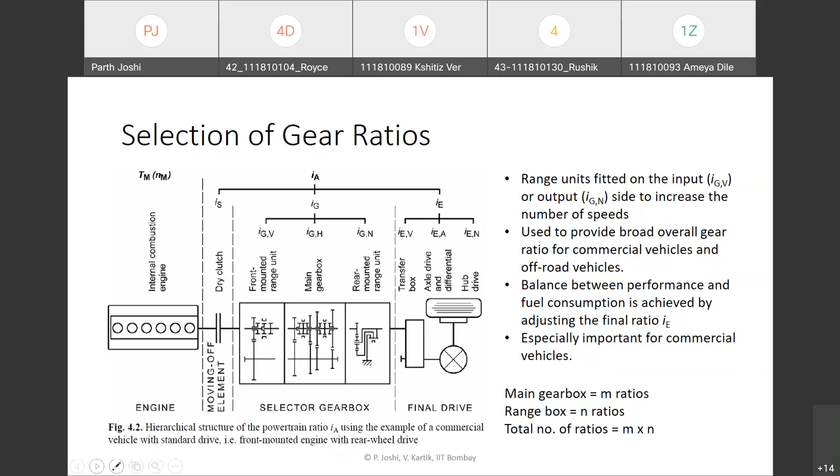No, sir. Yeah, okay, fine.

So we have different gear ratios between, let's say, the engine and wheel, or electric motor and wheel, whatever. So why do we have different gear ratios?

Particularly with respect to conventional vehicles, there's moving off under difficult conditions, which means accelerating from zero speed. Let's say if the vehicle is stuck in a pothole or anything, then we need a very high torque to get going and move it out. So then we need a high gear ratio for that.

Then, to reach the required maximum speed, again we need a gear ratio that will enable the engine, the appropriate ratio, so that it is able to propel the vehicle to that required speed. So these are kind of two extremes: one is having a high gear ratio so we get very high torque, and the other is getting the appropriate ratio between the speeds so as to be able to achieve a certain amount of vehicle speed.

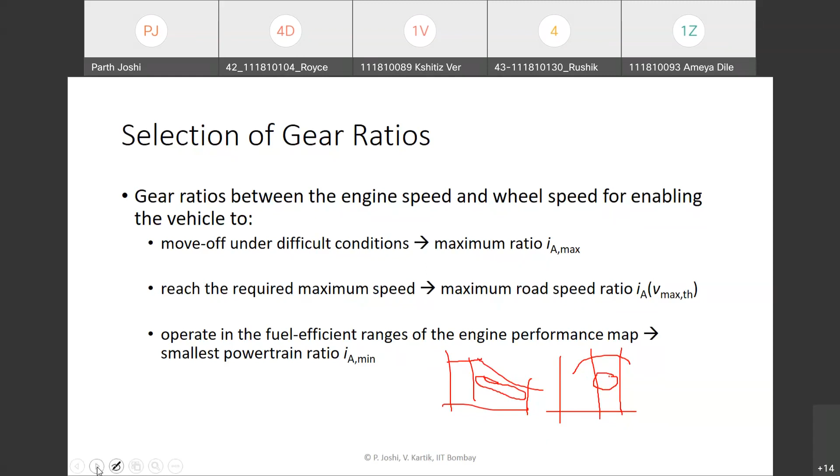So the gear ratios that we select should enable the IC engine to operate in its best fuel efficiency zone. Having a wide overall gear ratio is especially important for passenger cars with powerful engines and very low drag coefficient, like more sports or utility kind of vehicles. So then for that, having a wide overall gear ratio is very important.

So having a very low, I mean let's say first gear ratio should be very high, and the ratio of the highest gear should also be such that we are able to achieve a very high vehicle speed. So that means we are asking for a very wide overall gear ratio in that sense.

In this figure, it is shown that for a certain range of engine speed operation, what is the corresponding vehicle speed range, or let's say for this case, the gearbox output speed. So a certain engine speed corresponds to a certain gearbox output speed depending on the gear ratio chosen. For the maximum gear ratio, the gearbox output speed would be probably at this lower end, so we get a high torque but low speed. On the other hand, for the minimum gear ratio, we get this kind of ratio between the engine speed and the gearbox output speed. So within this shaded envelope, we will get the corresponding gearbox output speed for a certain chosen ratio.

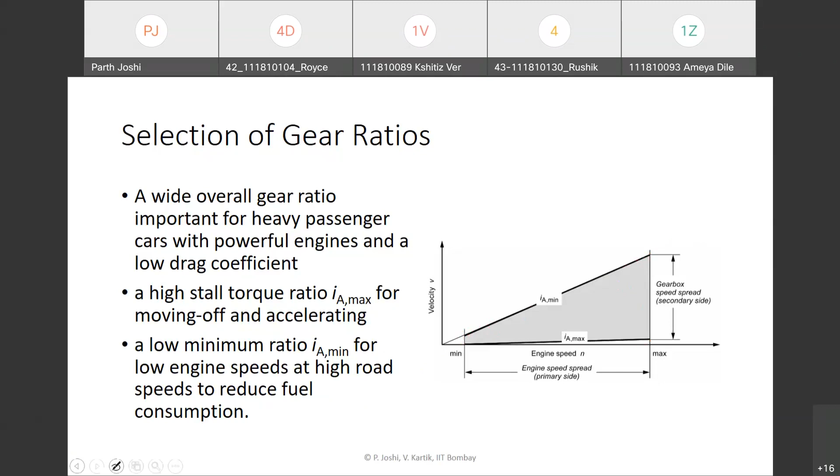Now we'll look at this term called overall gear ratio. This is basically defined as the ratio between the largest and the smallest ratio, or the first gear ratio divided by the last gear ratio. To put it simply, this overall gear ratio, for any particular application, depends on what is the specific power output - that is, the rated power divided by the total mass we can expect for the vehicle. It also depends on what is the spread of the IC engine speed, and also depends on the intended use.

So by speed spread, let us say we have the torque versus speed kind of plot, this is the minimum and maximum. Whatever is the range between them, that is the speed spread.

We need large overall gear ratios, especially for commercial vehicles, because they have very low specific power output. For a certain amount of rated power, they carry a lot of mass along with them. So we need several gear ratios, especially more on the lower side, because they generally operate at low speeds.

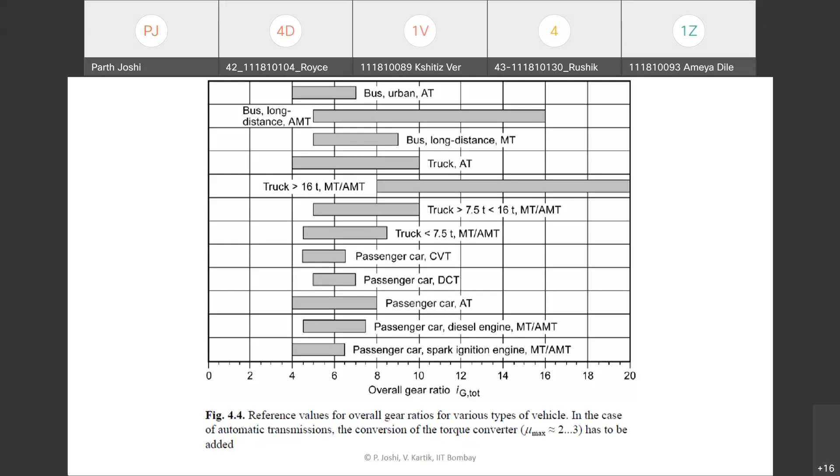Now we come to the selection of the gear ratios particularly. How do we select the largest gear ratio? The largest gear ratio is for the lowest gear. This is mainly required.

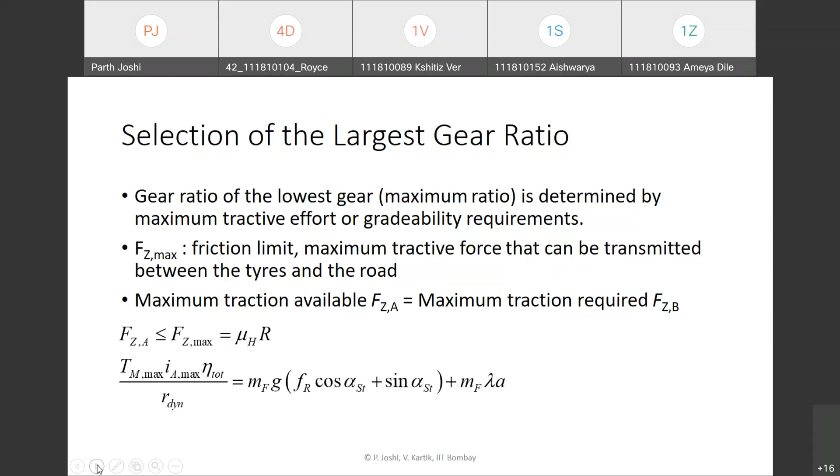Generally for passenger cars or commercial vehicles, we can design the transmission's largest gear ratio for maximum gradability. Gradability, as we saw in the previous session, is the maximum grade that the vehicle can climb at a certain constant speed.

Let us say the vehicle just gets moving, like at 1 km per hour speed or even less, just crawling and trying to climb a certain steep slope. So what will be the slope the vehicle is climbing? For that grade or angle alpha of the road inclination, we use the previous equation to find the value of i A max.

So using this equation we can calculate the largest gear ratio.

So this was the gear ratio based on torque requirement. Now in addition, there are some categories of vehicles which have so-called crawler gears. These kinds of vehicles, like building construction vehicles or road sweeping vehicles, or some other commercial vehicles, move at extremely slow speeds.

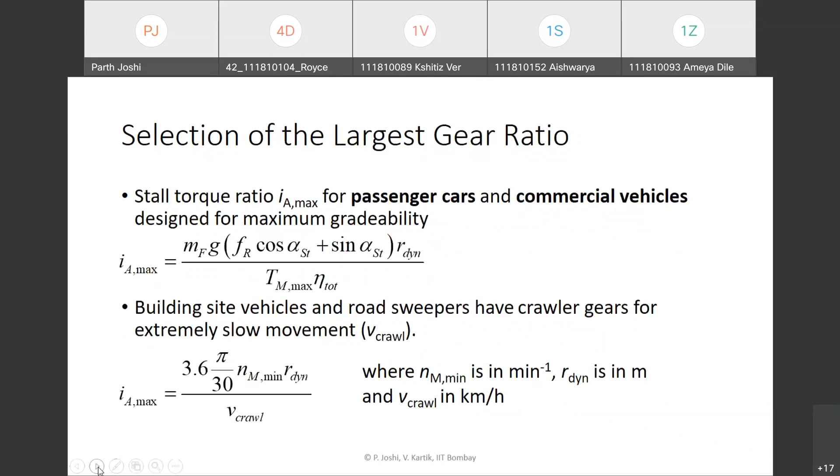So now we saw how we select the largest gear ratio. Now we will come to how we select the smallest gear ratio. The largest gear ratio was dictated by torque requirement, whereas the smallest gear ratio is selected on the basis of the requirement of maximum speed.

Let us assume there is zero slip in the power transmission from the wheel to the road - an ideal power transmission. We also assume that the maximum speed of the vehicle is reached at the maximum engine speed, which is a reasonable assumption.

So the maximum vehicle speed determines the ratio of the highest gear. We know the maximum engine speed, and if we know the maximum vehicle speed that has to be achieved in the highest gear, we use the simple kinematic relation of velocity equals radius into angular velocity.

So at the highest engine or motor speed, multiplied by the radius divided by the gear ratio, will be the maximum vehicle speed. Using this simple equation below, we can select the smallest gear ratio.

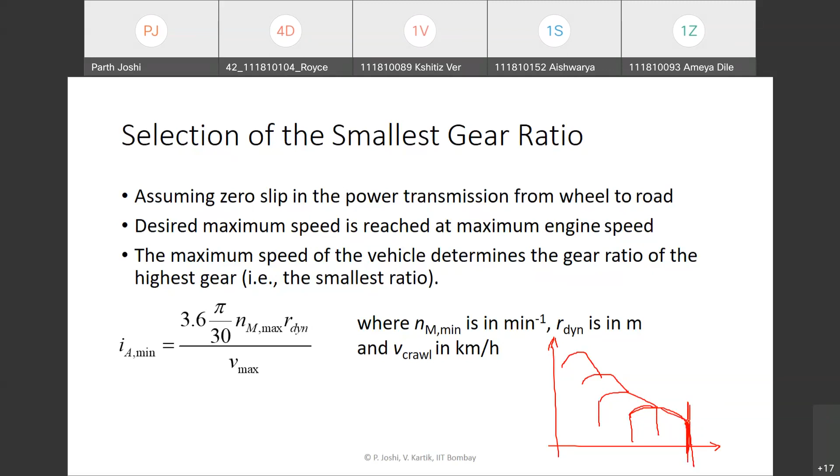So if we have a vehicle maximum speed specification, we can place this torque speed curve accordingly, so that we get the maximum speed at the highest engine speed in that highest gear ratio. Is that clear? Yes sir, okay.

Then we'll move to more specifics of the smallest gear ratio selection. If we consider commercial vehicles, there are limiting factors like speed restrictions imposed by the government - legal speed restrictions on what is the maximum allowable. On highways especially, like on Mumbai-Pune Express Highway, we have 80 kilometers per hour for heavy commercial vehicles, and for passenger cars, 100 kilometers per hour. Similarly, we may have different speed restrictions at different places - especially on turns, we may have lower speed limits like 40 kilometers per hour or so.

For passenger cars, another important consideration for selection of this gear ratio is that passenger cars end up spending more time in the higher gear. In the highest gear, it may actually spend more than 80% of its time, considering extensive amounts of highway driving. That is another consideration - so if we have more emphasis on the maximum speed, then we select the gear ratio appropriately.

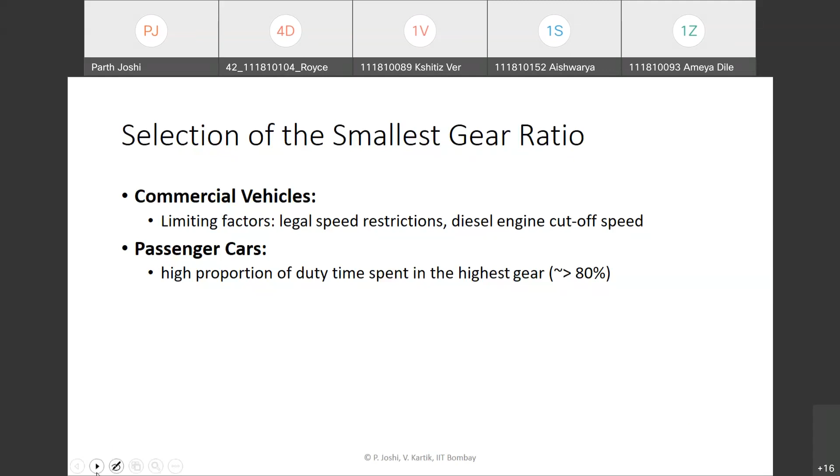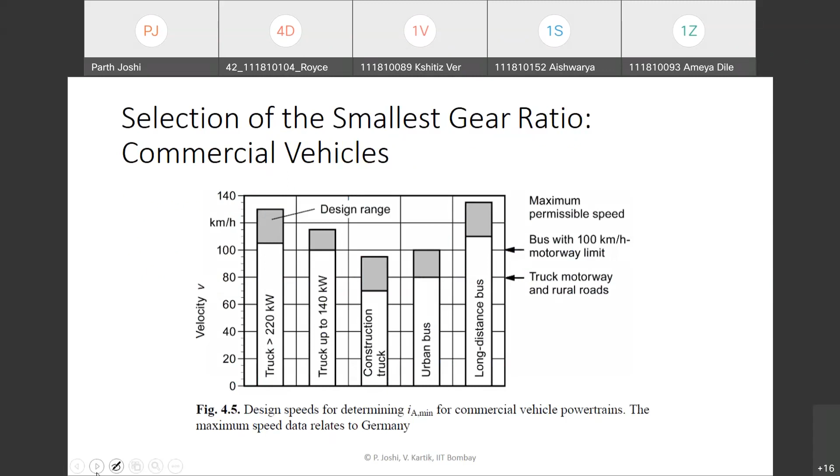Now when we come to passenger cars, there are different approaches that we can think of. If we consider conventional IC engine powered vehicles, we saw how the torque versus speed plot looks like, right?

For multiple gears, now if we try to plot the tractive force versus vehicle speed - if we try to plot what is the tractive force required at any constant vehicle speed, the acceleration is zero. So in the longitudinal dynamics equation, tractive force minus total resisting force R should be equal to zero. If we equate this, the resisting force will have air resistance, grade resistance, and rolling resistance. If we equate this tractive force to resisting force, and for every possible vehicle speed calculate this tractive force required and plot that, it comes out to be something like this.

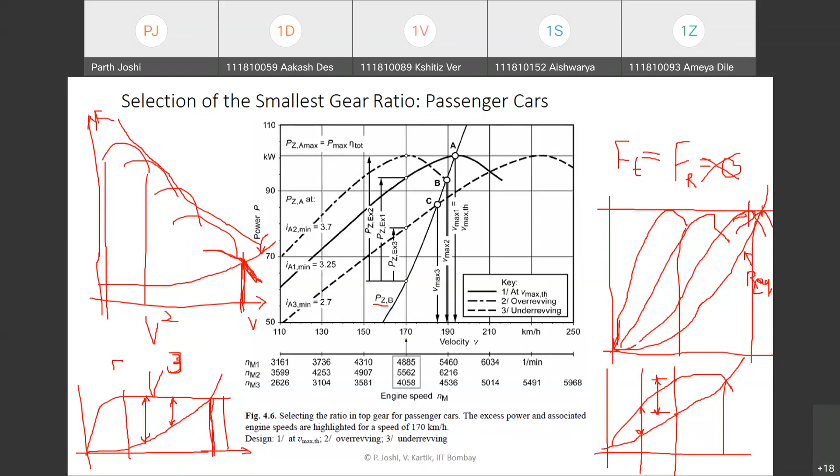So we looked at this approach where we place... how do we place the power versus vehicle speed curve, and depending on that, with respect to the tractive power requirement versus vehicle speed, how do we place the power versus speed plot? Depending on that, we have something called overrevving design and underrevving design, in addition to placing the maximum power point at the maximum vehicle speed.

Overrevving design is such that the IC engine has to run at a faster speed to achieve the same vehicle speed. So if we have this curve like this, and I'll use a different color, say this blue one.

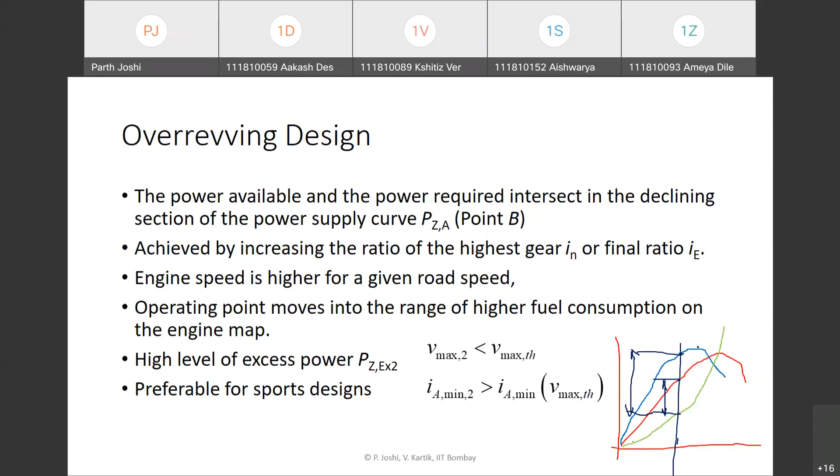Now if we care more about fuel consumption, then we have an under-revving design, where we try to lower the IC engine speed for the corresponding vehicle speed. So now we have this blue curve for the over-revving design.

We have this red curve corresponding to this particular Vmax kind of design, and let us say we can think of another curve which is further away from this. The green one is the tractive power versus vehicle speed required. For the blue curve, it cuts the green curve at the last point of the blue curve, which corresponds to the highest engine speed allowable. Whereas it cuts this purple curve - the green curve and the purple curve intersect at a much lower vehicle speed.

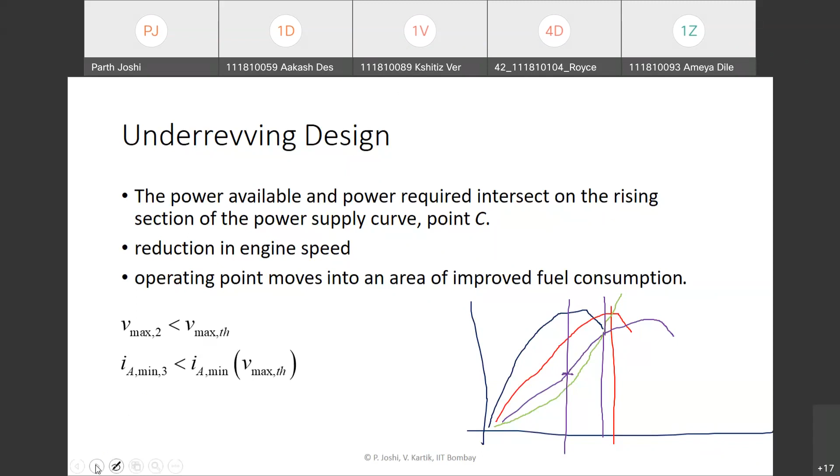Okay, fine. So we saw this underrevving design, which is more suitable from a fuel consumption point of view. So how do we achieve this?

Lower overall powertrain ratio in the highest gear. We can increase the overall gear ratio, like the ratio between the highest gear and lowest gear, or we can reduce the final drive ratio, and then we will get corresponding lower gear ratios for each gear of a multi-speed transmission, or we can increase the overall gear ratio by simply increasing the number of gears.

So we can add another gear for overdrive. Overdrive is where the ratio between input speed and output speed is less than one. Normally, for any gear ratio, the ratio will generally be more than one, so the engine speed is rotating at a speed higher than the wheel speed. But for the overdrive scenario, we have an engine running at a lower speed to get the corresponding wheel speed.

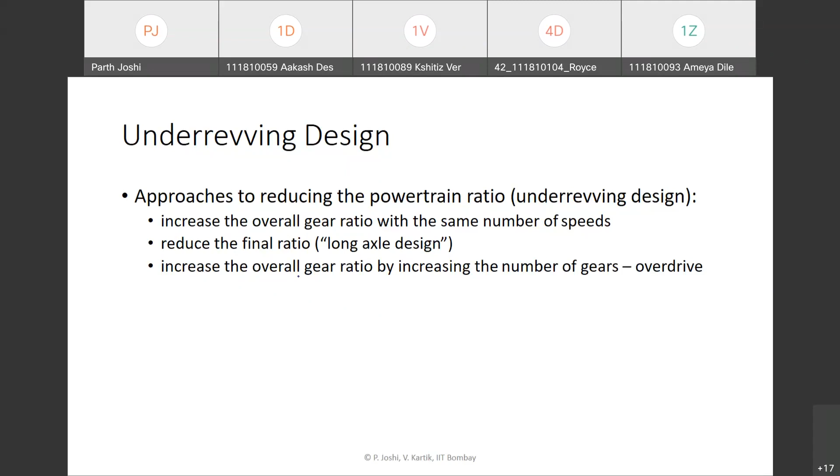So we'll see an example. Let us say if we consider a four-speed transmission, so we have four power versus vehicle speed curves. Then we construct this tractive power required curve, and the four power versus vehicle speed curves are the power available for different gears.

This figure A represents the design where we place the maximum power point, where the tractive power requirement and the tractive power available intersect at the maximum power point.

Then figure B shows that if we reduce the overall gear ratios, then this highest gear ratio curve will move farther away, giving us this underrevving design. Then it intersects at a point lower than this part, instead of here.

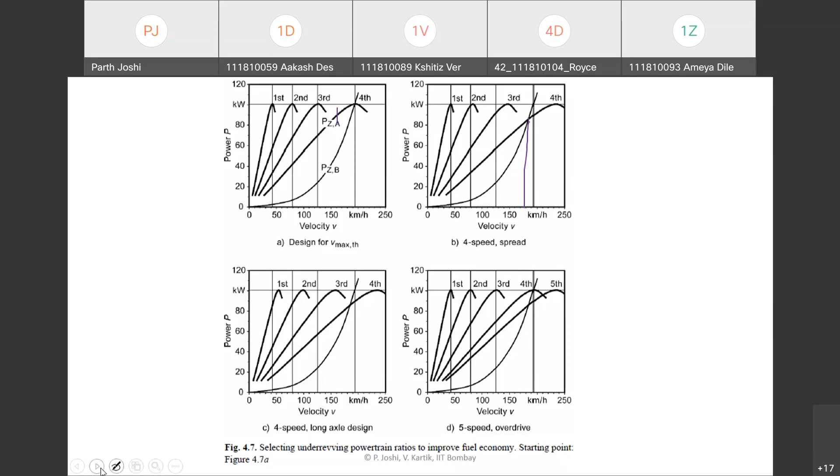So we saw how we select the highest and lowest gear ratios. Now, how do we select the intermediate gear ratios? There can be different approaches here, depending on our objective.

So one guideline can be that we place the intermediate gear ratios such that, let us say this is the maximum power curve, representing maximum power versus rated power. The torque versus speed variation for the rated power, on a torque versus vehicle speed plot, will appear something like this.

So we try to place the gear ratios such that the resulting torque versus speed curves closely approximate this hyperbola. That will be beneficial in terms of fuel economy as well as performance.

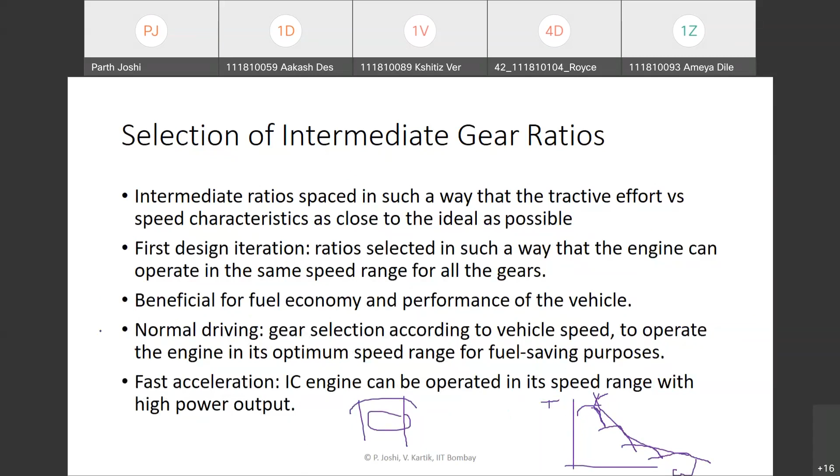If we just place, let's say, two gears between this, on the same hyperbola, the gap will be larger. As we go on progressively increasing the number of gear steps, the gap will be smaller. This can be a simpler approach - just an initial way to start the design. We can select it so that we consider the same engine maximum and minimum speeds for every gear, and select the ratios so that we get the same ratio between them. That may be a simple approach to start with.

Later on, we have to keep doing iterations to try to minimize this gap between whatever can be achieved and whatever we expect. So it's kind of a starting point approach. Okay, gear ratio selection.

So I think till now we have seen different approaches for how to select the largest gear ratio and the intermediate gear ratio. I recommend that we check - has anyone actually been able to extract the information that I shared, the activity part, comparison between the conventional and electric model? Maybe those who joined later on, have any of you tried that activity which I shared in the first class?

We'll try to apply these learnings in that context. Anyone has anything to contribute on that? Has anyone done any comparison between conventional and electric models of the same vehicle? If not, then we can actually try one example, and then you can try it yourself later in the next few sessions. We will discuss on that. So please respond - does anyone have anything to contribute? Has anyone done that?

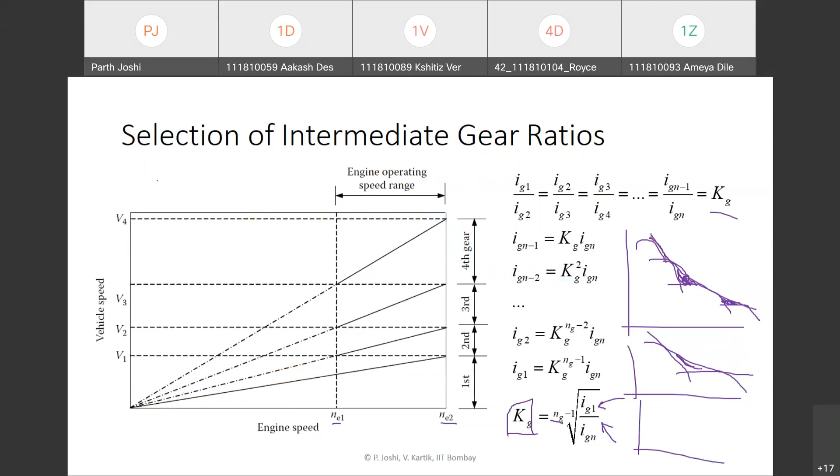So I assume that no one has tried it. So we can do an example here, and then we'll try to do that for another vehicle in a similar manner. Okay, fine, sure. So I propose this example: let us say, if we have seen all these vehicles around, Tata Nexon - we know that we have conventional as well as electric variants for this particular model, right? So we have a petrol as well as diesel as well as electric model.

So I just made this table and tried to fill it up quickly with whatever information I could get on the internet, I just put it in this table. So what I recommend is that we'll spend the next few minutes or so on this activity.

So first we will try to fill up this table as much as possible. We have some fields already filled up. So let's take the next 10 minutes.

You can just check this thing, so I have selected the Tata Nexon base model. The base petrol has different variants, right? Petrol with manual transmission, AMT - basically automated manual transmission, electric, then diesel manual and diesel AMT. So these are 5 different models.

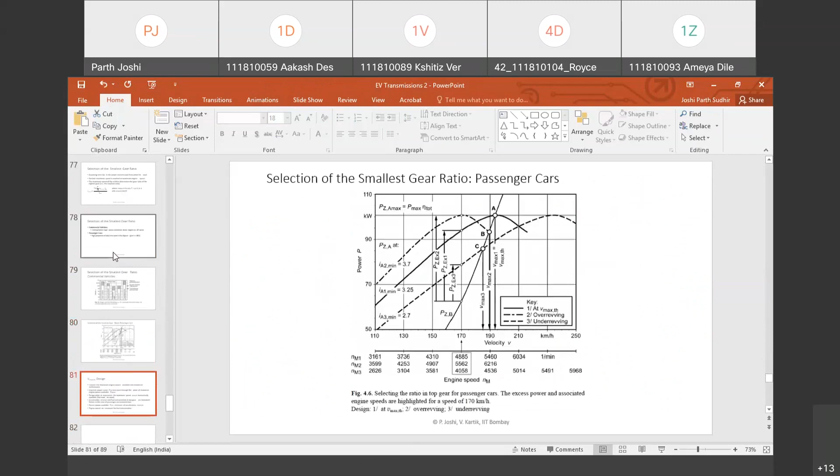So any further updates? Is anyone able to find any more information - maximum speed, acceleration performance, or gradability, anything?

For petrol manual, they are stating 0 to 100 in 11.6, but some website is stating tested as 13.01. Petrol manual, yes sir, and you were saying 11 as official figures but 13 as tested. Okay fine, so then we'll go with 13 actually.

Okay, anyway I think we can continue this later on. So you can note down all these things for now, and in the next session we'll continue with this activity. So for now we'll just proceed with whatever we have.

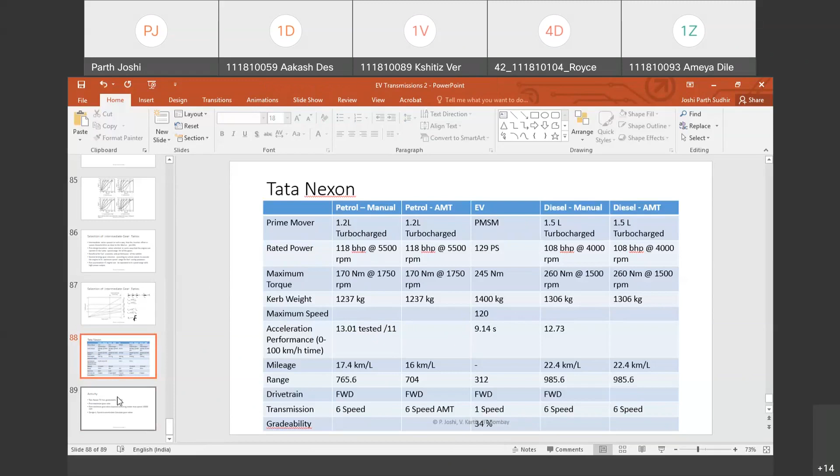So I found that Tata Nexon has gradability 34% as per their website, right? So what we will do is, we know this gradability specification, and from this sheet we also know what is the maximum motor torque, right? We know what is the kerb weight.

So then we will calculate gross weight. Let us assume 4 passengers are sitting, so 4 human beings. Take some average weight for that, then 4 passengers plus that curb weight. So then that will be the total weight, and so you know the mass.

Then you have to find the maximum gear ratio using this gradability specification. I hope you have noted down the equation for calculating gradability, which we previously discussed.

And we will also try to find out the minimum gear ratio based on this vehicle speed specification. So let us assume that maximum motor RPM is 10,000. Nowadays we have very high speed motors, so 10,000 may be a reasonable approximation. We actually have even higher than that, but let us say we assume 10,000 in this case.

Then we will get maximum and minimum gear ratio. Let us say we have a 4-speed transmission, then try to calculate the gear ratios using that geometric progression approach. If you are able to propose some other approach which is more useful than that, that is more than welcome. If you have some other logic of calculating gear ratio, let me know.

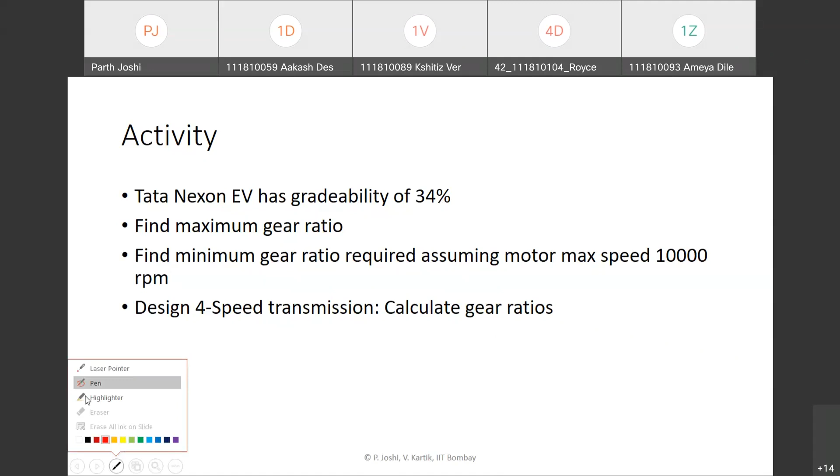So we have to basically come up with 4 gear ratios. This activity, what we will do is, we will consider that since we may not get full data or whatever, we will try to use this information to come up with some of these performance metrics.

Let us say we start with this gradability thing, and with this motor plus transmission combined together, we will see how the drivetrain performs, like we'll try to derive the acceleration performance of this whole concept, and we will also try to see how this vehicle runs with a single speed transmission.

If we consider this motor alone, like Tata Nexon EV has a single speed transmission, so they have just 1 gear ratio. So let us say we have this single gear ratio, and

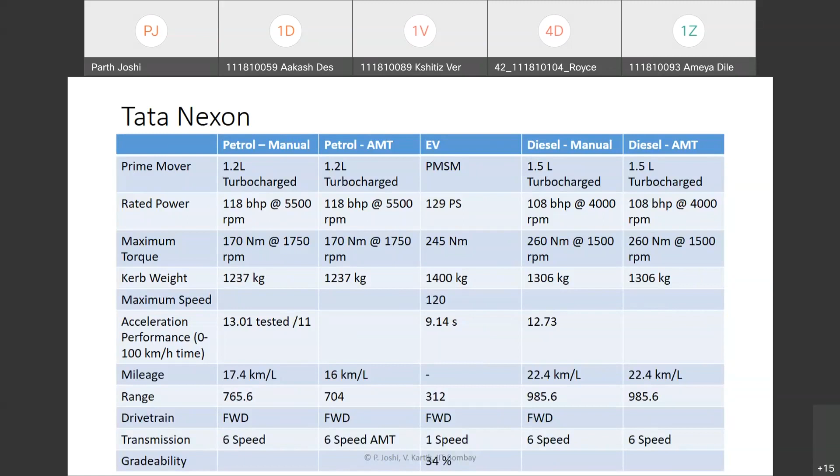We will probably assume a different motor in that case, motor plus, for this which has the same rated power. So maybe some higher speed motor, latest, which may be able to go to 20,000 rpm or so, with that gear ratio. And then we choose another motor which has maximum speed of, let us say, 10,000 rpm, and then we have a 4-speed transmission which has different gear ratios.

We will try to compare how they perform in terms of energy consumption and acceleration performance. So we will learn what can be the possible benefits. We will actually try to do this using some simulation based approach.

So we will do this activity in parts. First we will just start off with these basic things, like let us say we'll select gear ratio, we'll come up with the 4 gear ratios. Then we will try to calculate this simple tractive force versus speed characteristics, plot them, and finally in a simulation environment we'll try to compare them. So I'll see how this goes.

So I will try to create a demo simulation model for you to demonstrate this. I recommend all of you do this activity so that you can actually see, in a demonstration, how these things will actually work out.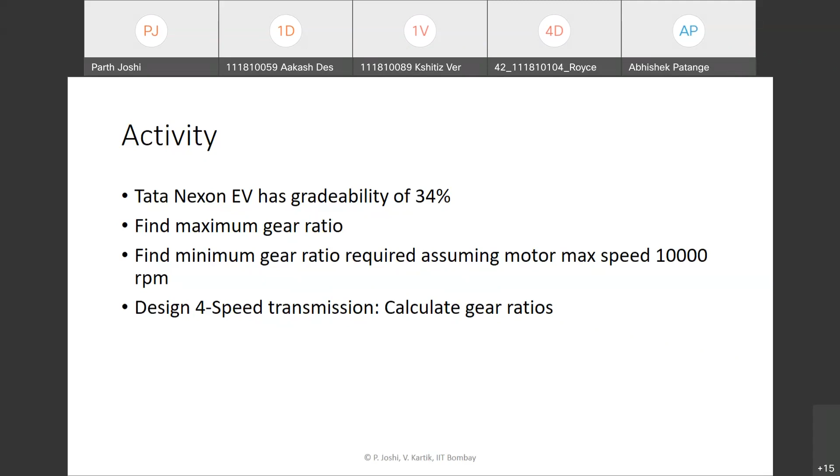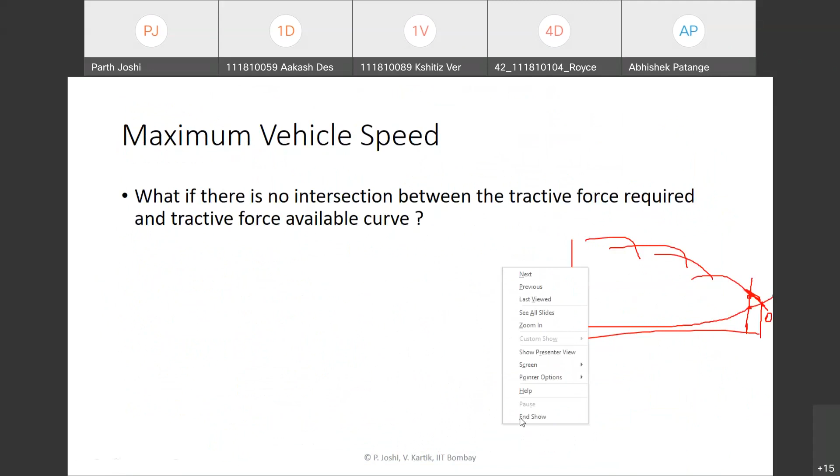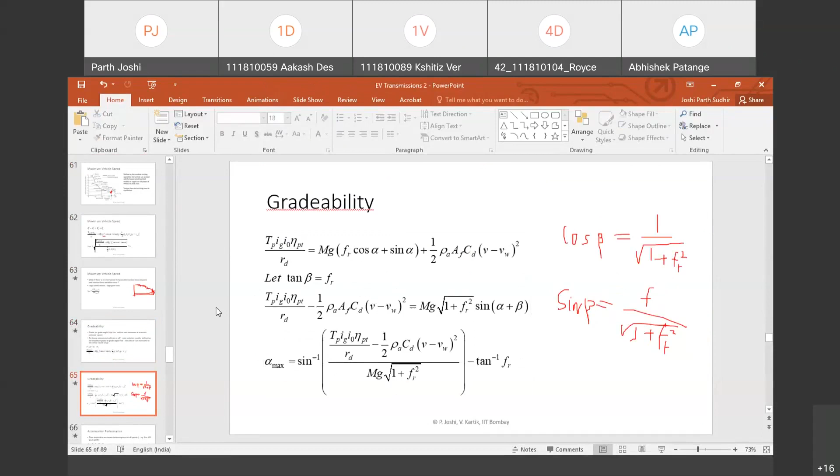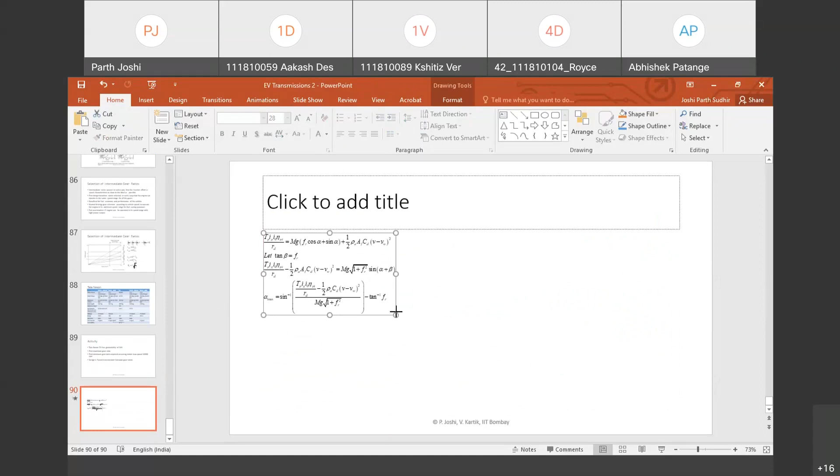So I'll give you the equation for gradeability. So this equation which I have put up on this slide, which I'm showing, these are the equations for calculating gradeability. So you can use these equations. If you have any questions, you can ask me.

So here we'll have to, there are some data which we need to assume as well, to try to see what you can do. If you have any doubts, you can ask me.

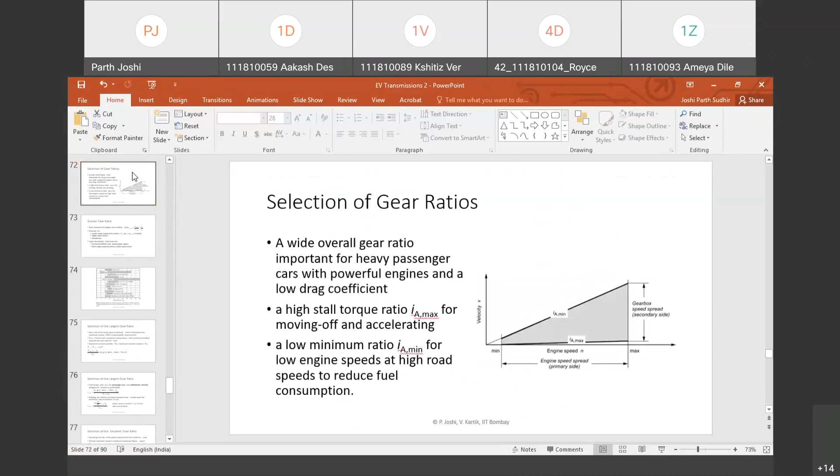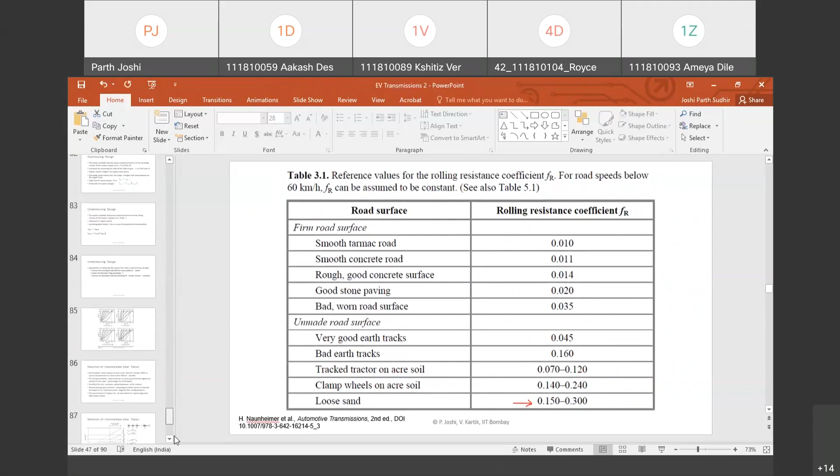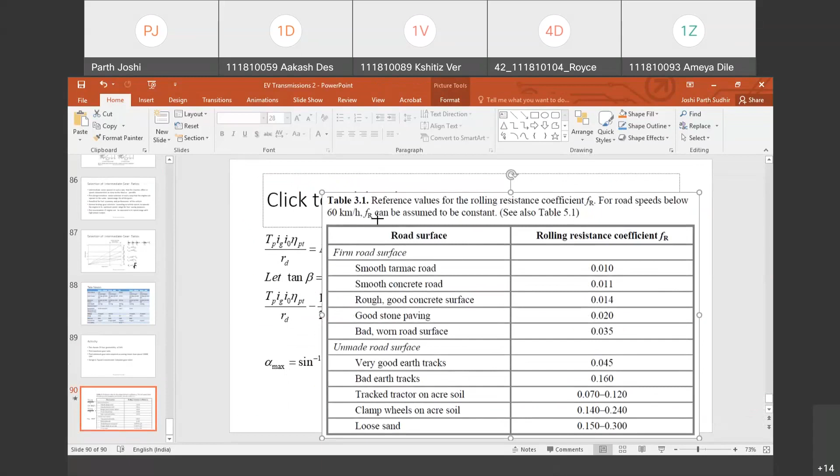I had shared some charts, so you can put up that as well. So you can use this chart and use the equations to calculate. So we need to basically find out this product of Ig into I naught. Ig is the total gear ratio, and I naught is the final drive. So we first need to find out just the overall powertrain ratio.

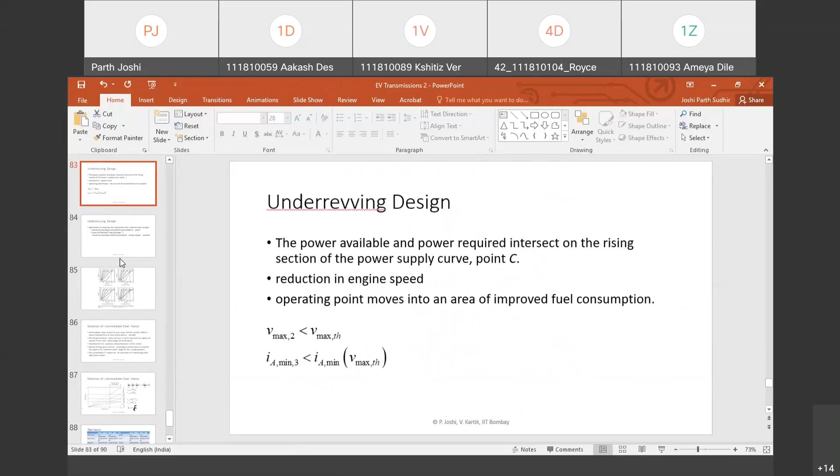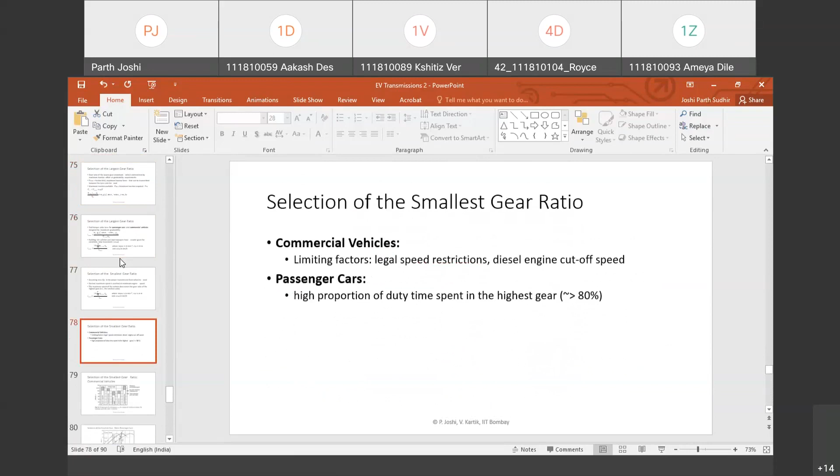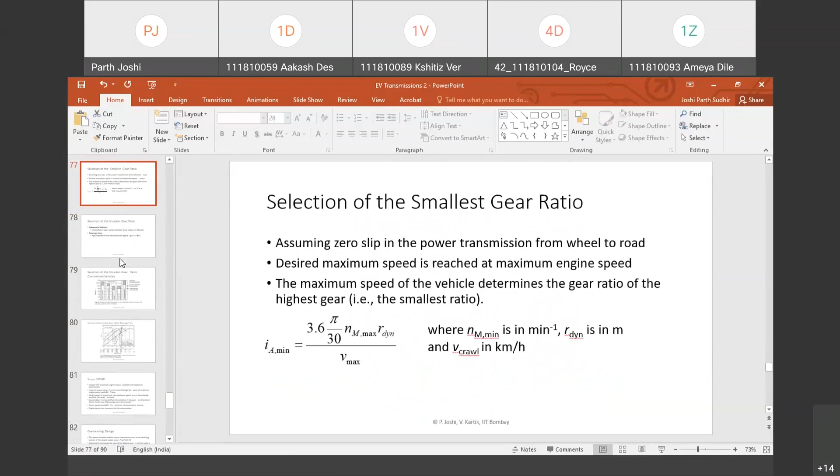So you can actually also try the minimum gear ratio, that is probably simpler to do. In the sense, the equations are simpler for that. The minimum ratio equation also I have put it up here.

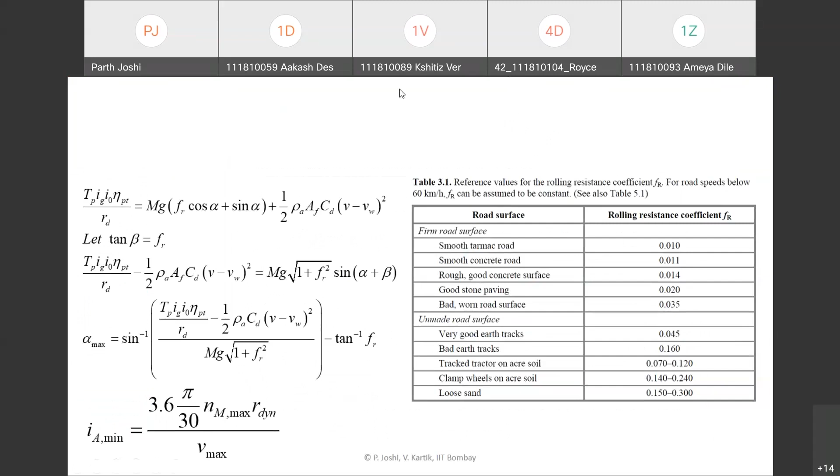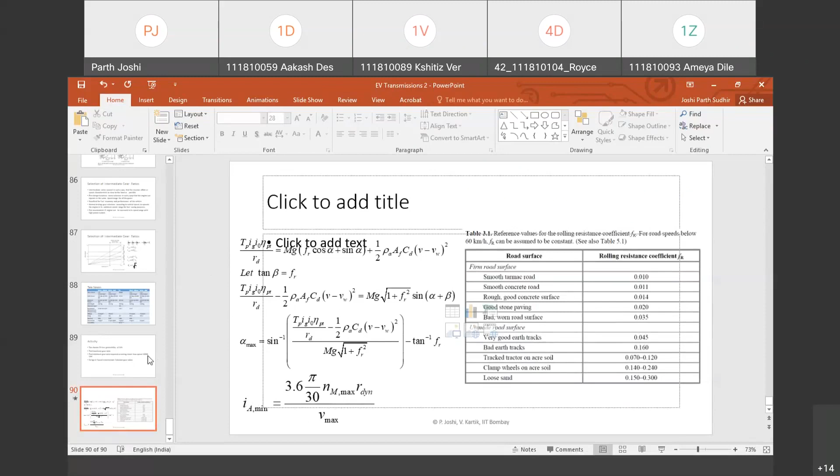Sir, so if we take 10,000 RPM, then the minimum ratio is coming out to be 6.38. Minimum ratio is 6.38. Okay, fine.

Maximum gear ratio, anyone was able to calculate? So I think it's actually already around 11 o'clock, and I have a hard stop at 11. So I think we should continue this activity for the next session. In the meanwhile, you also work out these things: maximum gear ratio, minimum gear ratio, and the four gear ratios. We will try to see how this evolves, like for a single speed versus two speed or four speed. So I think we can stop for now, and we'll continue in the next session.

Okay, so I think next session we will meet in the next week itself. Tuesday morning is okay for you? Nine o'clock or something like that? Or you want Tuesday evening? That is also, I think, okay for me.